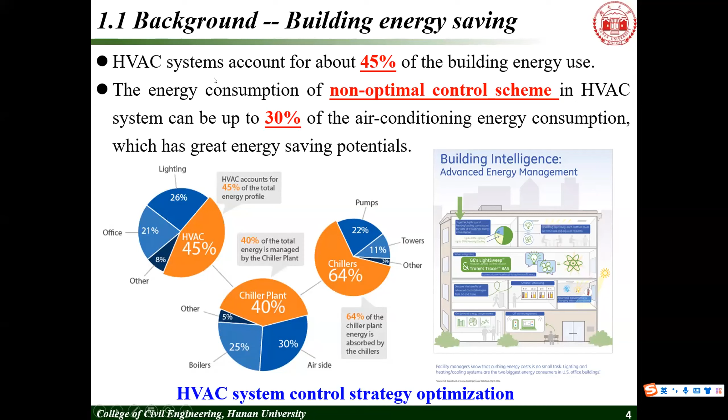Currently, HVAC system control methods mainly focus on rule-based control and model-based control. Rule-based control methods don't consider the dynamic changes of the environment and HVAC systems, and generally fail to obtain an optimal system control performance. Model-based control methods, such as model predictive control, need to construct the system model and highly rely on the model accuracy. When the model is not accurate enough, the performance may diverge from expectations.

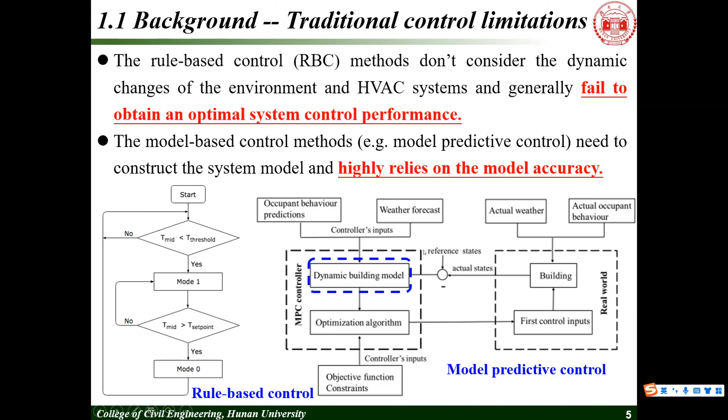In addition, the scalability of the traditional HVAC control method is poor. For new buildings, systems, and climate zones, models are difficult to reuse and need to be remodeled, which greatly increases the modeling effort and time.

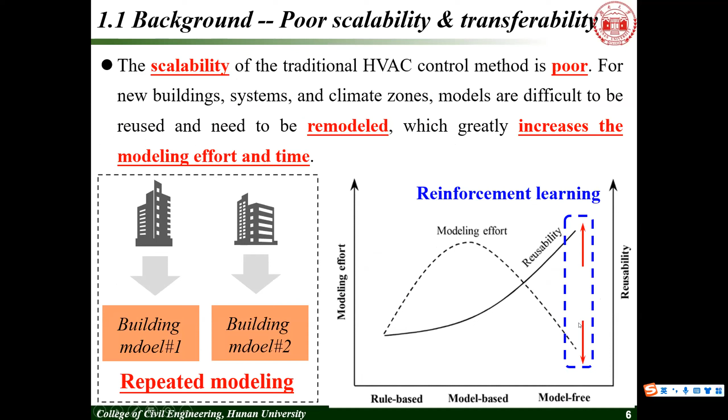Model-free control methods such as reinforcement learning can be used to greatly improve the model reusability. Model-free reinforcement learning methods have the characteristics of model-free self-learning and online learning. They can reduce the dependence on prior knowledge by interacting with the environment and automatically learn the optimal control actions with the feedback reward.

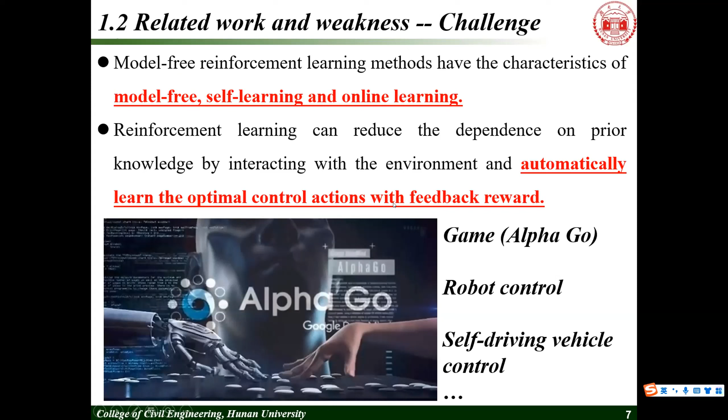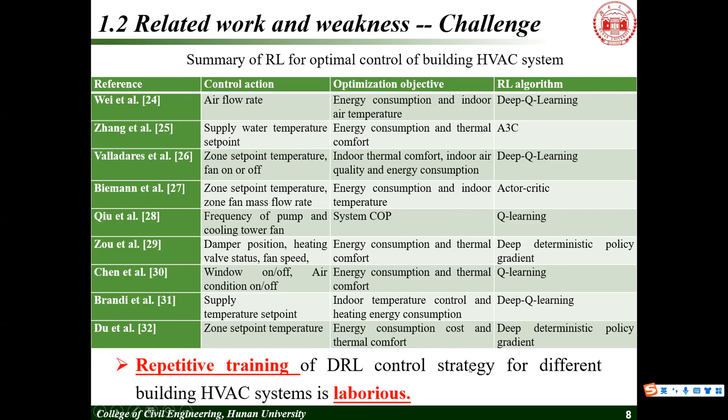Reinforcement learning is also a feasible solution for optimal control of HVAC systems, and it has been extensively studied in recent years. However, the repetitive training of deep reinforcement learning control strategy for different HVAC systems is laborious. There are few studies discussing this weakness. Therefore, it's necessary to find a way to improve the training efficiency of the reinforcement learning control strategy.

Reinforcement learning combined with deep neural networks is named deep reinforcement learning. Transfer learning can transfer the knowledge learned from a source task to another related task, and it is a feasible way to utilize the transferability advantages of neural networks. With this idea, transfer learning can transfer the pre-trained parameters of source network to the target network and reduce the cost of model training.

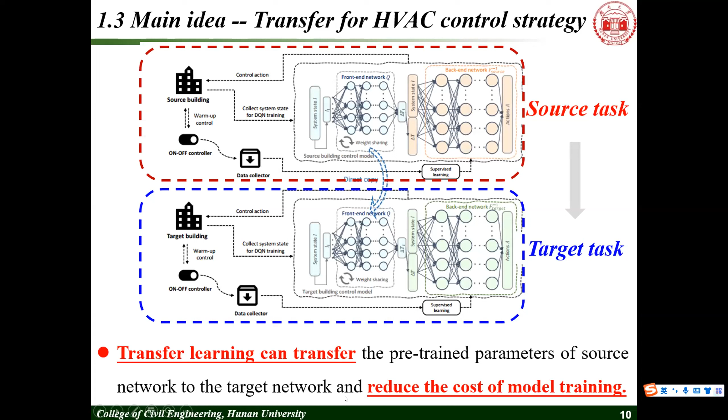Then let's look at the methodology. Reinforcement learning mainly consists of the agent, environment, action, state, and reward function. The agent learns to execute optimal actions by interacting with the environment. It is aimed to maximize the cumulative rewards, thus obtaining the optimal control actions, such as the temperature set point sequence. In this study, the deep reinforcement learning algorithm is used for HVAC control.

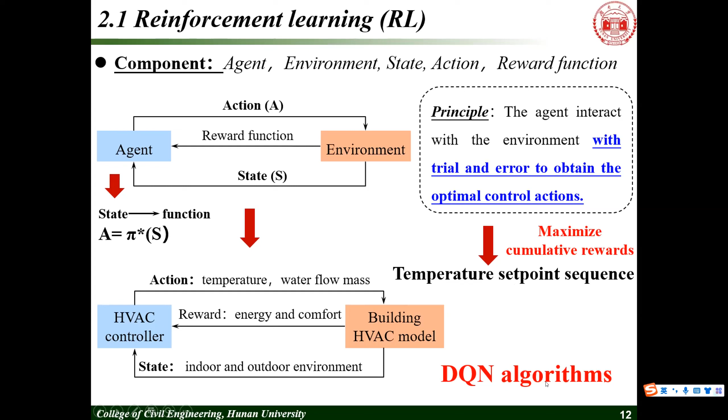Transfer learning is to transfer the knowledge learned from a task to another related target task. In this study, the fine-tuning-based transfer learning method is used. It can reuse some parameters of the pre-trained network in the target task.

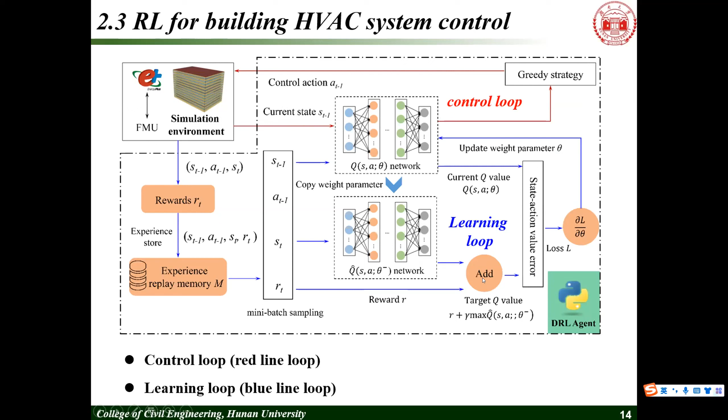The optimal control process of the reinforcement learning is as follows. The reward function of the energy consumption and the temperature violations is defined first. Then the Q values are calculated based on the reward function. Finally, the mean-square error between the target and the estimated Q values are used as the loss function. The weight parameters in the DQN are updated by the gradient descent method.

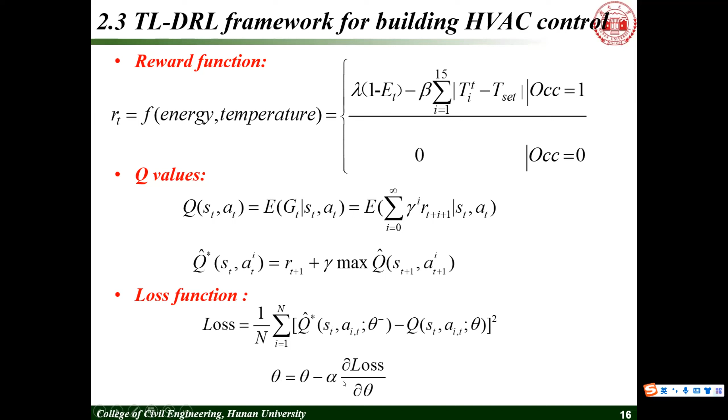As the whole process is completed in the simulation environment, and EnergyPlus is normally difficult to use to apply the DQN control algorithm in the built-in software, Python is used to implement the DQN control algorithm. This co-simulation testbed was developed to realize the data transmission between these 2 models.

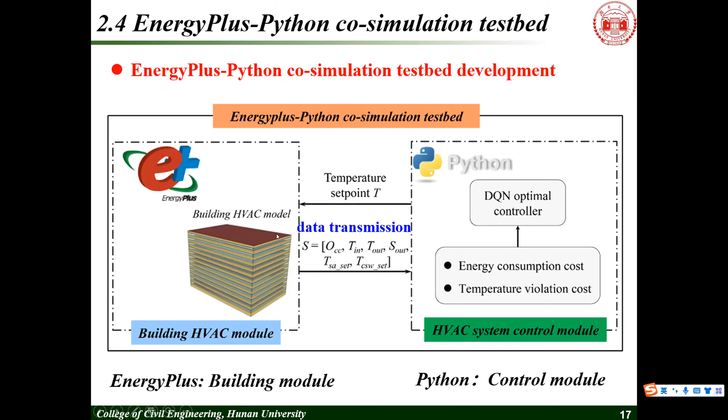This figure shows the detailed implementation diagram of the developed co-simulation testbed. The EnergyPlus model is wrapped into a functional mock-up unit model. The DQN control module is implemented by Python. PyFMI is a Python package which supports loading with FMU models for co-simulation.

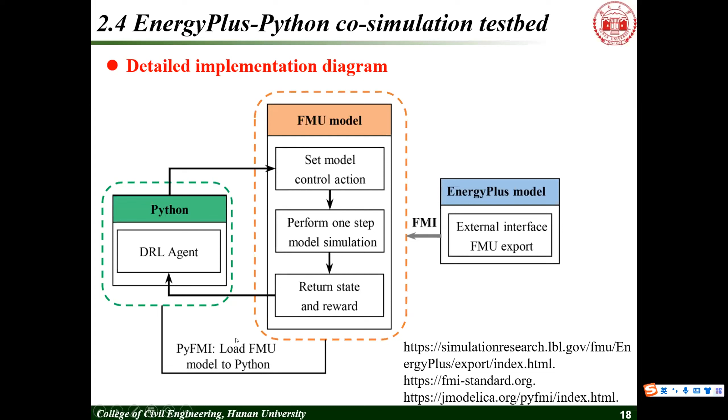And then I will show the results and discussions. A large multi-zone office reference building with VAV systems is used to evaluate the proposed deep reinforcement learning control strategy. The supply air temperature and the chilled supply water temperature are regarded as the DQN control actions.

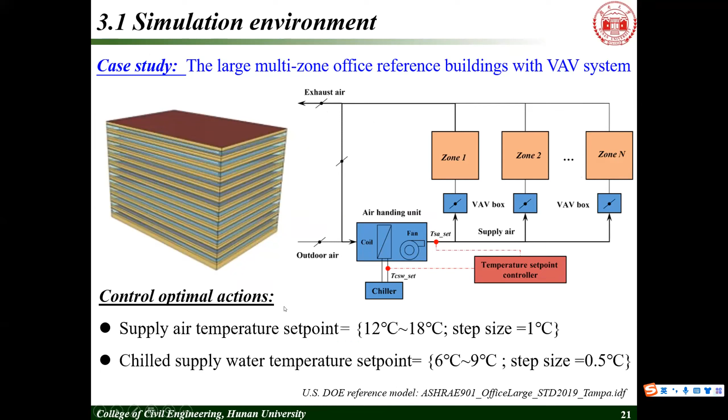Three large office reference buildings from Denver, Austin, and Houston are used for the experiment settings, and the three buildings form transfer pairs with each other, creating three transfer scenarios. In addition, since transferring different numbers of layers has a great effect on control performance,

the control performance of transferring different numbers of layers is also discussed and evaluated. Three performance evaluation metrics are used to evaluate the transferability of the DQN control strategy. First, robustness is the standard deviation of the cumulative rewards, energy consumption, and temperature violation. The DQN training efficiency is the average DQN training time per episode, and the control performance is the

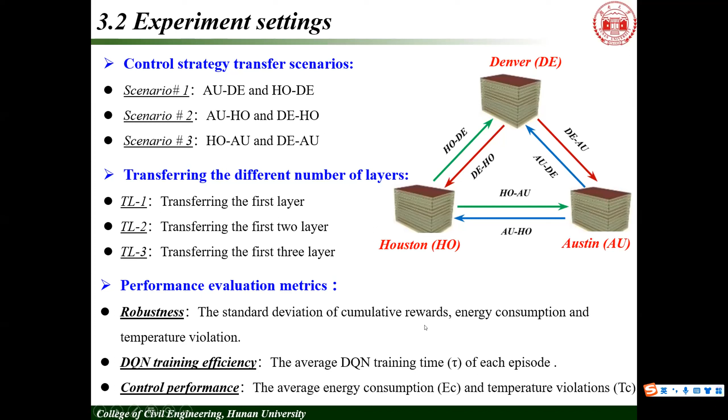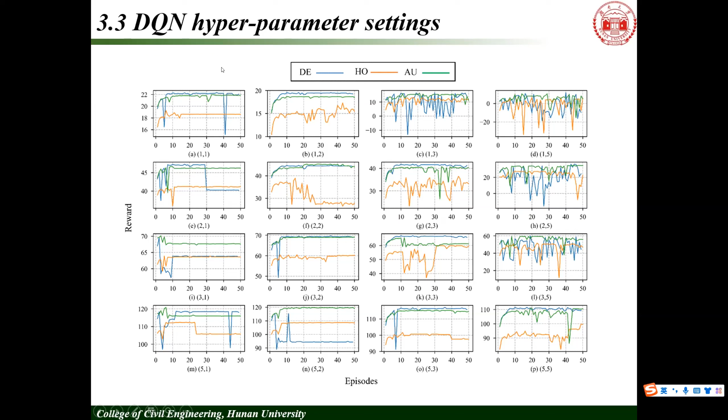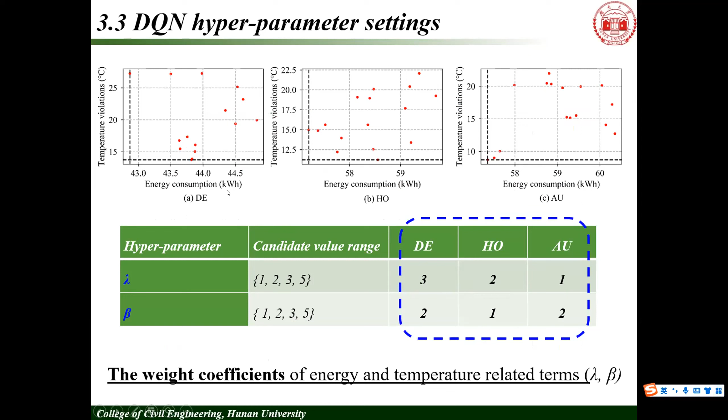average energy consumption and temperature violations. The model hyperparameters have a great effect on model control performance. First, the near-optimal model hyperparameters should be determined based on the results of convergence, robustness, and control performance of the DQN baseline models. Then let's look at the results.

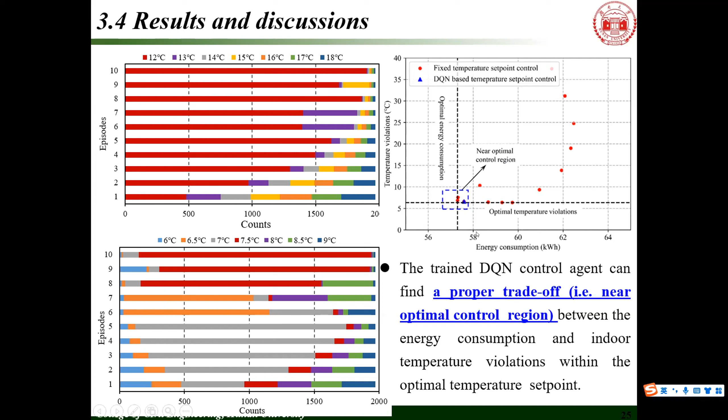This figure shows the DQN control results. It can be seen that the two controlled temperatures can keep stable values after some episodes. Meanwhile, the trained DQN control agent can find a proper trade-off between energy consumption and indoor air temperature violation with the selected control temperature set point, and that performance is in a near-optimal control region. These results show the effectiveness of the DQN control strategy.

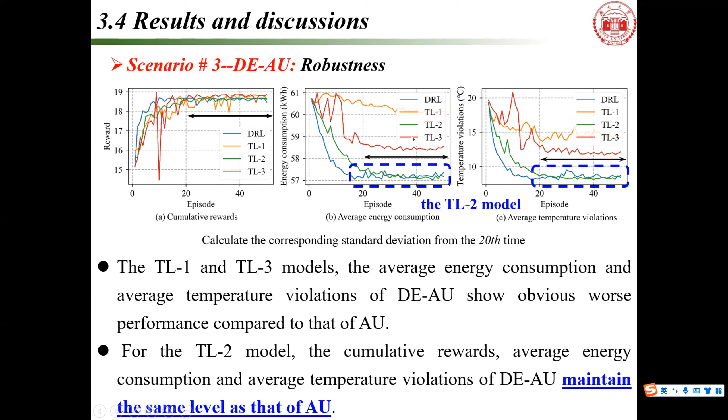After the DQN control performance is verified, the transferability of the DQN control strategy between different HVAC systems is evaluated. We take the results of the experiment of Denver transfer to Austin as an example. This figure shows the cumulative reward, average consumption, and temperature violations of Denver transfer to Austin. It can be seen that for the TL-2 model, the control performance of Denver transfer to Austin maintains the same level as that of the baseline DQN model.

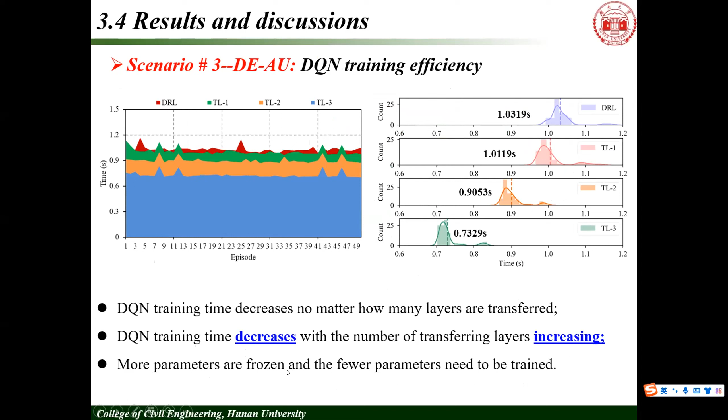This figure shows the training time for transferring different numbers of layers. It can be seen that with the number of transferring layers increasing, the DQN training time decreases. This is mainly because more parameters are frozen and fewer parameters need to be trained.

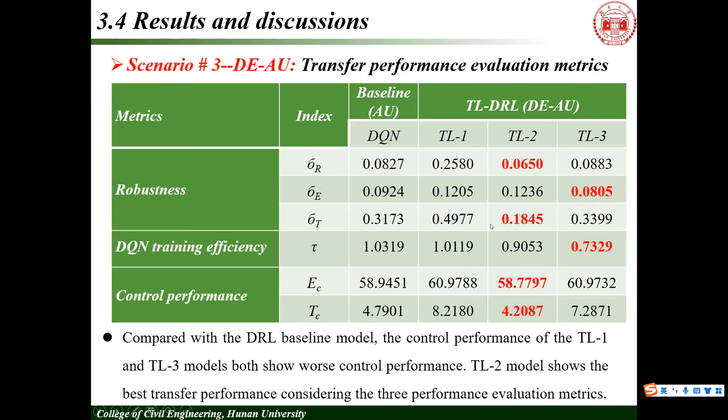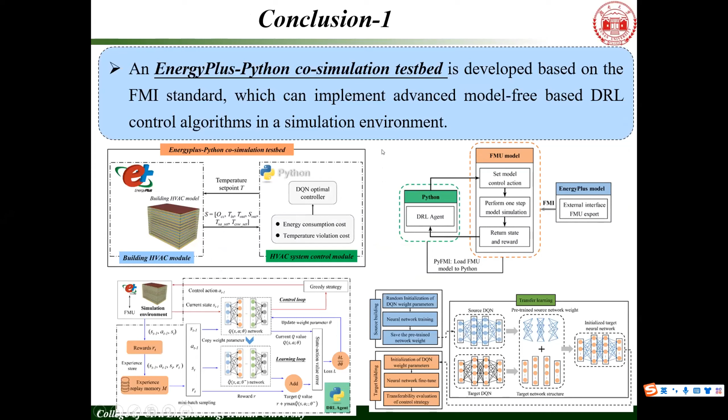Finally, let's make a conclusion. First, an EnergyPlus-Python co-simulation testbed is developed based on the FMI standard, which can implement advanced model-free-based deep reinforcement learning control algorithms in a simulation environment. Second, a transfer learning and deep reinforcement learning integrated framework is proposed for control strategy transfer of building HVAC systems, which can effectively improve the deep reinforcement learning training efficiency at the building HVAC system level.

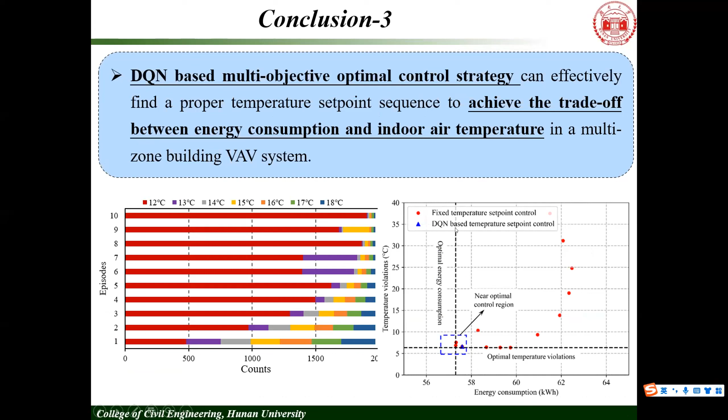Also, the DQN-based multi-objective optimal control strategy can effectively find a proper temperature set point sequence to achieve the trade-off between energy consumption and indoor air temperature in a multi-zone building system. Finally, the proposed transfer learning and deep reinforcement learning model performance is sensitive to the number of network layers. Comprehensive analysis of the transfer performance evaluation metrics shows the TL-2 model has the best comprehensive transfer performance.

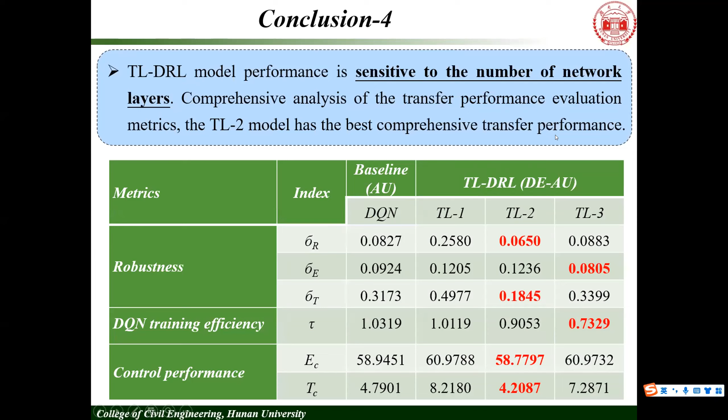Yeah, thank you, Fang. Any questions from the audience? Yes. Yeah, sure, go ahead. Yeah, go ahead. Hello. Hi, hello.

I have a question. Why didn't you use the software TRNSYS for simulation? Because TRNSYS is very efficient compared to Python and EnergyPlus with DesignBuilder. For me, I work with PCM and buildings, and I have simulations from DesignBuilder, TRNSYS, and Python, and I have a comparison from the three applications. TRNSYS is very efficient compared to DesignBuilder and Python.